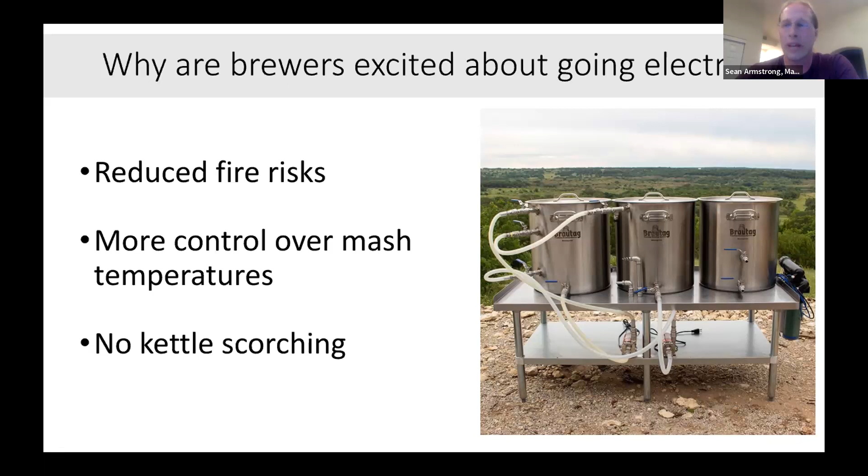So, beer brewing—why would you go electric if you're brewing beer? One reason is reduced fire risk, which I'll show on a slide in a second. Another is more control, leading to better brewing of beer. And there's no kettle scorching, which is good both for the materials and for the taste of the beer.

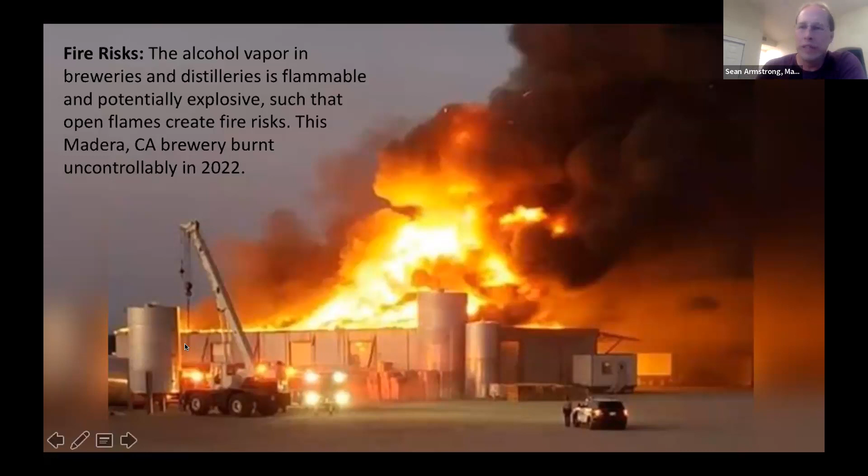Here's an example of what happens when you mix flames—like a methane fire, natural gas heating the tanks of beer, the mash and such—with the fact that alcohol, when brewing, gets into the air. You can have large buildups of flammable gas, since alcohol is flammable. Every year, at least a few breweries in the United States catch fire. I've been going through the news here stateside, and this is one example, near where I'm sitting in California. This fire burned for almost 5 days, because once the alcohol catches fire, there's almost nothing you can do to put it out. So one reason to stop putting flammable gas into buildings is that it causes fires.

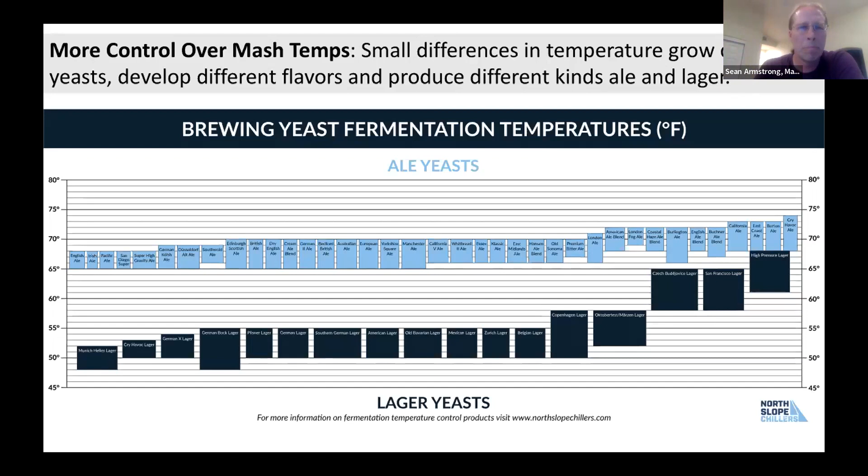As mentioned before, heat is added to foods at the industrial scale, but also at the smaller scale. However it's added, if it's added underneath, you can get, in the case of beer, you can burn the bottom of the pot. And if it's a very large kettle, you have to go in there and scrub it down. I have a friend who works in a brewery, and that's part of their job, is to scrub out these kettles.

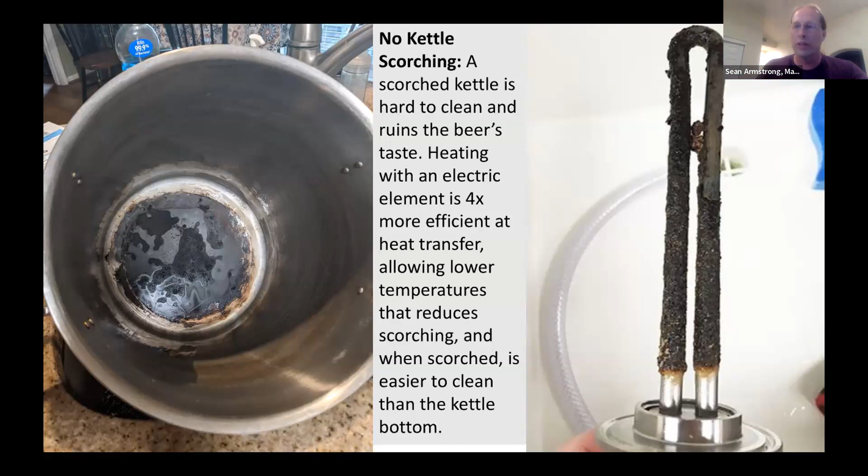When you're in northern Germany, they don't use solar collectors to make the heat. They use ground source heat pumps. They dig wells down in the ground, put pipes down there, and collect the heat from the ground. And I found that beer brewing changes the way that they add renewable energy, be it solar panels here or ground source heat pumps there. But it's consistent: they try to electrify the brewery and then add cheap electricity or cheap heat.

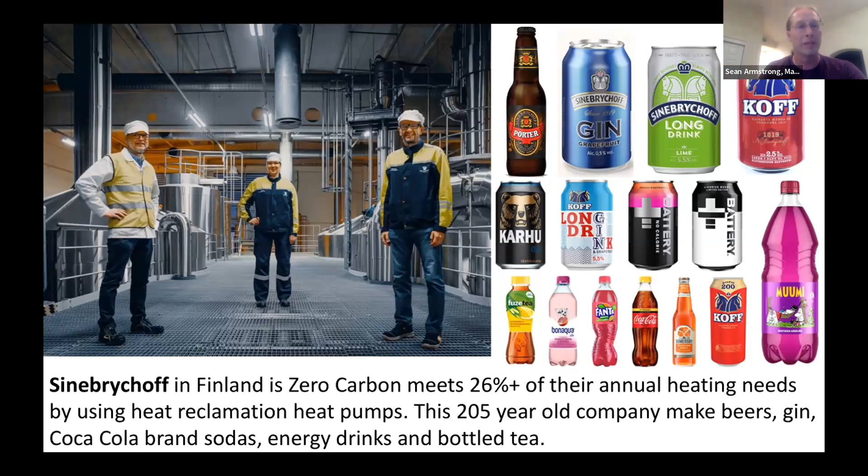They're taking the feces of the cattle and turning it into methane gas and then burning it. So they're doing biodigestion of all the poop that comes out of cows. When you bring cows into a dairy barn, they poop while they're getting milked, and then you have to scrape all of it out. What do you do with it? Do you just let it release all of the methane into the atmosphere, or do you capture it and burn it?

The latter answer is the best thing, because methane is a terrible climate change agent. So if you capture it and turn it into CO2 by burning it, you reduce the climate change pollution it causes by about 30-fold. It's like 1/30th as much pollution if you just burn the methane compared to letting it go into the air.

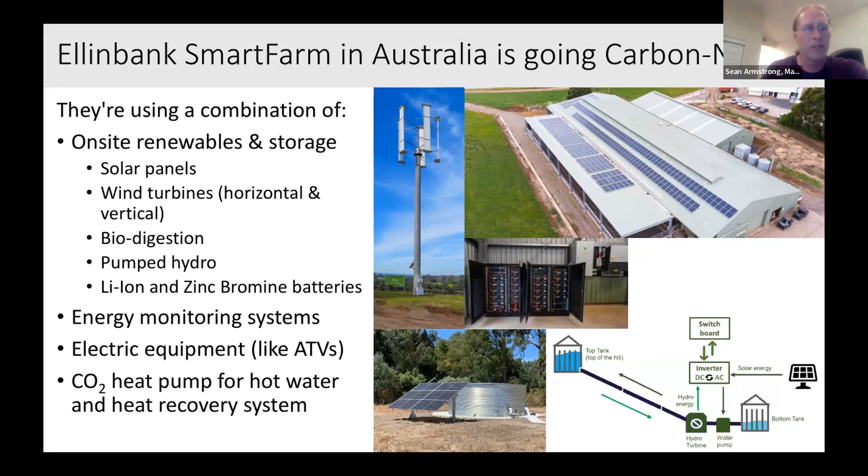Safer, more efficient, all electric, renewably powered.

Pasteurization can be done at lower temperatures, like 140 Fahrenheit, kind of slowly, or at a higher temperature quickly. But in either case, you add heat that is usually below boiling. You get the temperature up, but not to boiling temperatures.

Now you have this thing that's heated, milk, or it could be beer, or anything. You heat it up to kill everything in it, and then you need to take the heat away. That's an opportunity to recycle the heat. So instead of just sticking the beer into a refrigerator, you could stick it into the equivalent of a big building refrigerator, and as you pull the heat out, turn it back into source heat for the water that gets heated up again for pasteurization, and grab maybe, like you saw before, about 26%.

With this method of recycling heat, they only have to add heat at the beginning once a week. They start off getting a whole bunch of water really hot with their boilers, and then they're just recycling it for about a week before they have to start over again, adding heat.

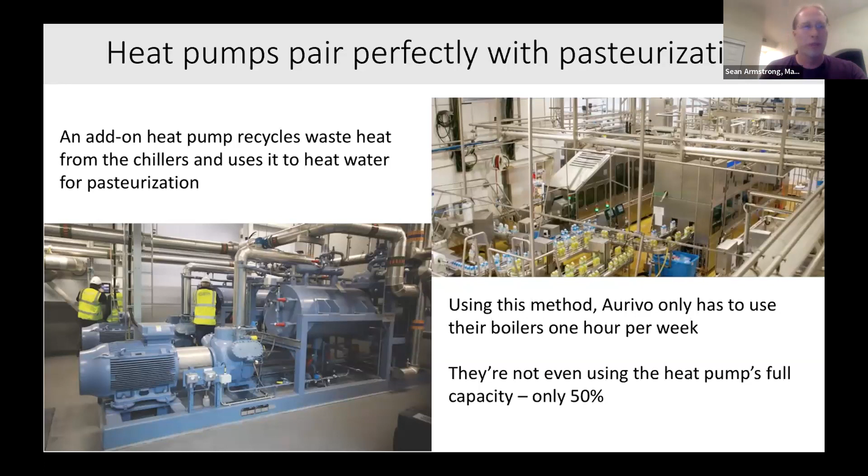Very impressive, very efficient, very good business move. The number one cost of this business after labor is energy. So first you make your facility efficient labor-wise, and then you make it efficient energy-wise, and that's good business.

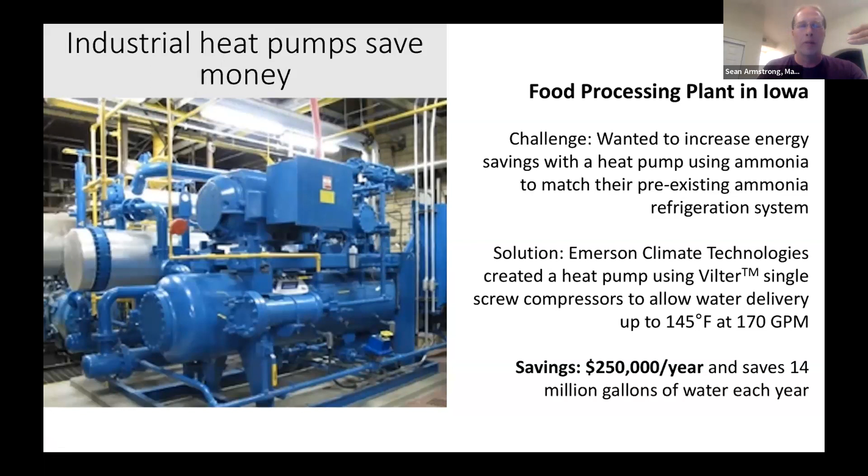On that topic of business, this is a good example of how this business is saving $250,000 US dollars a year by installing a heat pump. They did not have a heat pump before for capturing the waste heat, and now they're using a heat pump for chilling in this dairy facility here in Iowa. So yeah, a whole bunch of money just from recapturing the heat.

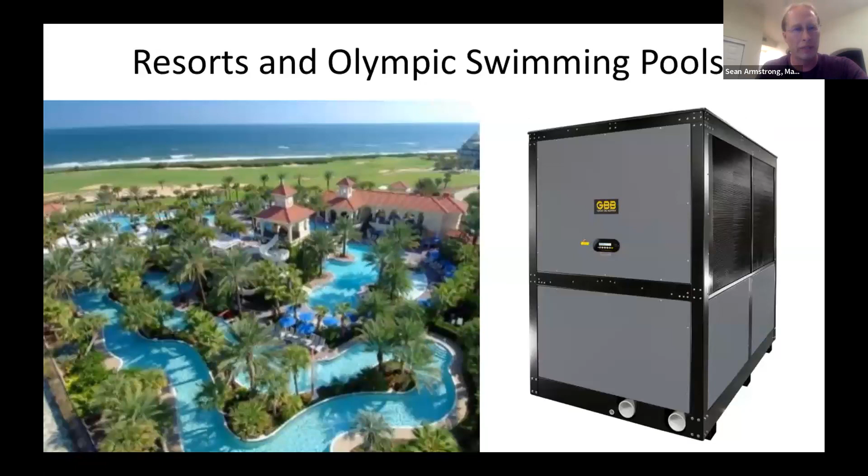I was going to go into restaurants next. Just pointing out, if you have a tourism facility, that commercial use, and you're burning gas in there, heat pumps dramatically lower the bills. And for that matter, if you're using electric resistance instead of gas to do any of the heating work, a heat pump will use 1/3 or 1/5 as much electricity as electric resistance. So big money savings, regardless if you're using fuel or electric resistance, by going to a heat pump.

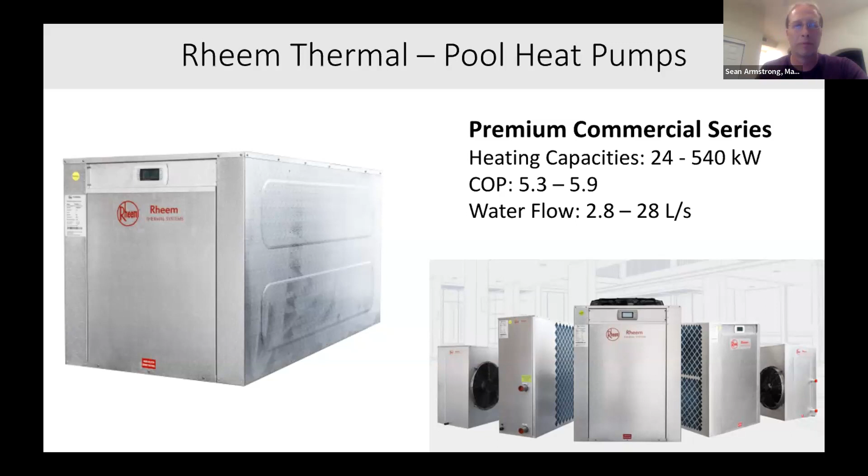And restaurants. So, reasons to go to this commercial facility and get rid of the gas. One is just burns and fires. Whenever you have open flames combined with gas, you have real danger.

I collect newspaper articles of restaurants that have blown up, and the question is always, did the person survive? Because usually what happens is they come in the morning, there's been a gas leak, and they're lighting one of the stoves, and the pool of gas around them blows up, and they're thrown against a wall, and they spend three weeks in the hospital in a coma, covered in burns.

So no burns, no explosion, no indoor air pollution. When you're burning gas, it's just as bad as smoking cigarettes. Gas from a stove has no filtration, no cleaning to it, it just burns. It's a very dirty burn.

In restaurants, they have big fans above the dirty burn in order to get rid of the air pollution. But if the fan isn't working well, or if someone puts their head over the stove, they're inhaling like putting their face into the exhaust of a car, only dirtier. The exhaust from a car goes through a catalytic converter, and there's no catalytic converter that takes out pollution from a gas stove. So if you get rid of gas stoves, you get rid of a lot of pollution. And it keeps the kitchen cooler.

Now let's move into construction, talking about how gas is being used primarily in industry. One of the biggest uses of gas is firing a cement kiln, a classic industrial use. They'll have essentially a gigantic blowtorch and torch limestone, and the process of heating it up super hot changes it and turns it into a dust that, when you dump water onto it, turns back into rock: cement.

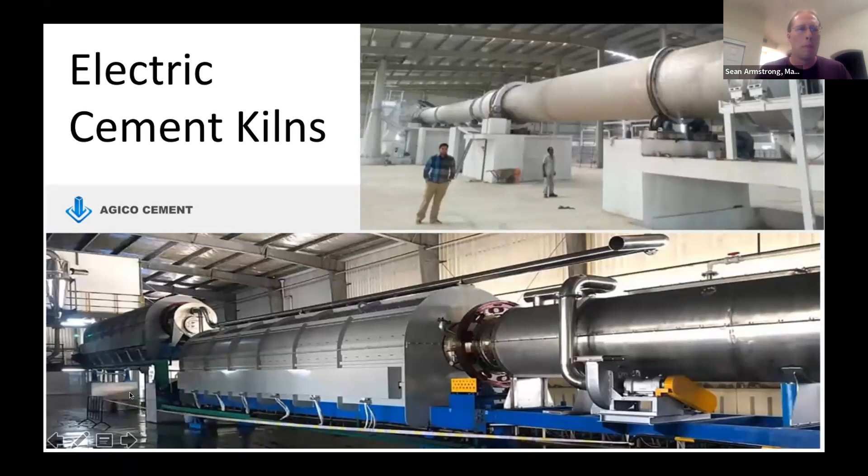This is kind of the future now. The semi-trucks just came out last year and this year, actually able to perform. We're seeing a whole bunch of them now on the market with really big batteries. I've seen them testing, taking them 1,400 kilometers on a charge - really amazing long distances. Big ones here in the United States, like the Tesla one that just came out.

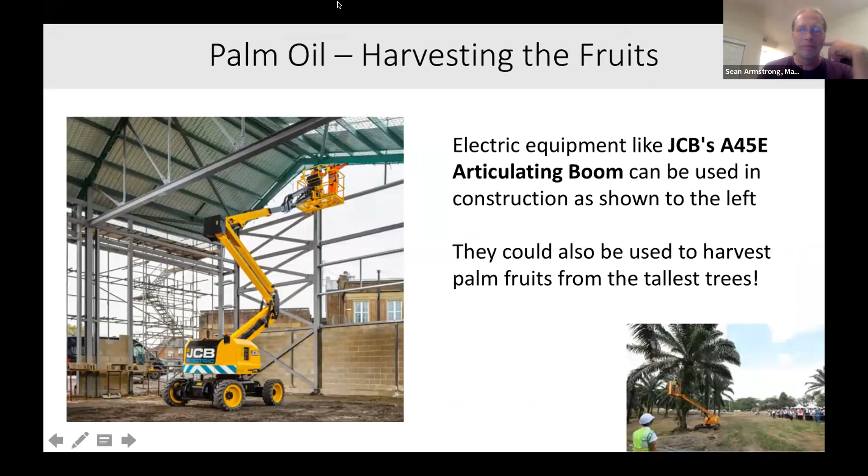You're hauling and pushing - farming often involves a lot of dirt work, so you make new spaces for things. These are just more examples of crossover: yes, this is construction equipment, but you might use it for farming.

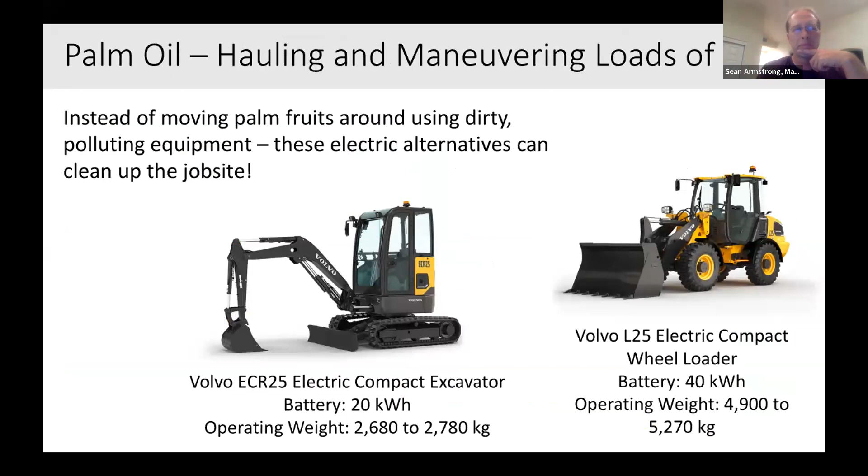Mining - Malaysia does a lot of mining, from my understanding. If you're trying to meet the needs of underground mining, underground is one of the most dangerous places to have an open flame because methane will build up and become explosive. That's often a cause of mine collapses and miners getting caught and dying - there was some reason for an open flame. As mining is electrifying, it's way safer without open flames. So Sandvik has announced plans to set up a new production plant in Malaysia for their electric mining equipment.

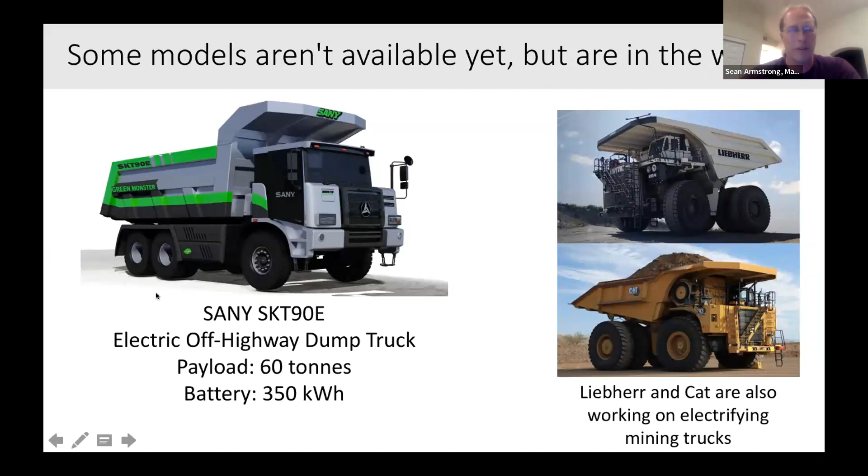Here we have an electric off-highway dump truck, and here's some more examples of mining trucks. They're not available today, but all of you are in this for the long haul, right? So if next year or the year following these trucks become available in Malaysia, if you prepare and get the community of business people ready for this, they'll be able to take advantage as they become available. Lots of these big vehicles are available now.

This is just a nice example of them trying to do it all at once. Norway is inarguably one of the leaders in the world in electrifying everything. Right now 80% of the vehicles being sold in Norway are electric, and they have electric construction sites at this point. In 2019, Oslo attempted for the first time to have a zero carbon, zero emission urban construction site, with buildings all around.

One of the nicest things about these vehicles is that they're quiet. Local businesses were able to keep their doors open during construction and didn't complain about the noise, because they're about 1/10 as loud. Your ears adjust for that, so it's experienced as only 1/4 as loud, but they are in fact about 1/10 as loud in terms of noise energy output. Still, 1/4 as loud is way quieter if you're near it. I'll note their grid is already 98% clean.

Malaysia right now, the grid is about 20% clean, 19% clean. But still, this is an opportunity to transition. Malaysia's grid is getting cleaner every year. The world's grids are getting cleaner every year because solar is being added hand over fist. Same with wind.

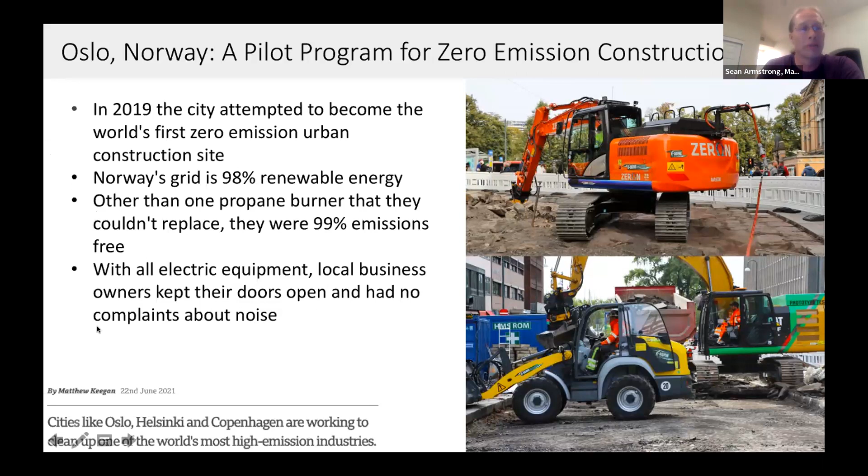Now, this is kind of fun. The Ford F-150, as well as many other vehicles, this is just one that's come out recently, and there's a fun picture of it. What they've done is, for construction sites, instead of having a generator, the truck itself is the generator, and it has 11 plugs on it that you can plug small equipment like saws into. You see all the things being run here, like chop saws and various Skil saws. All of them are being run off electricity from the truck.

This is one of the problems that we have in the United States, and I assume kind of anywhere: when you're starting to build, you'd like to have electricity, but usually you're building someplace that hasn't been built before, so it doesn't have electricity, or at least not to your site, maybe it's nearby. The process of getting electricity at your construction site is difficult and slows things down.

So what we're seeing is that cities in the United States are buying these trucks for landscaping crews, because landscaping crews can go out there and work all day quietly without disturbing anyone around them with their electric leaf blowers and electric lawnmowers. The city I'm presenting from right now has banned all gas outside landscaping equipment. You can't run a gas lawnmower in the city I'm in right now, Coronado, which is near San Diego.

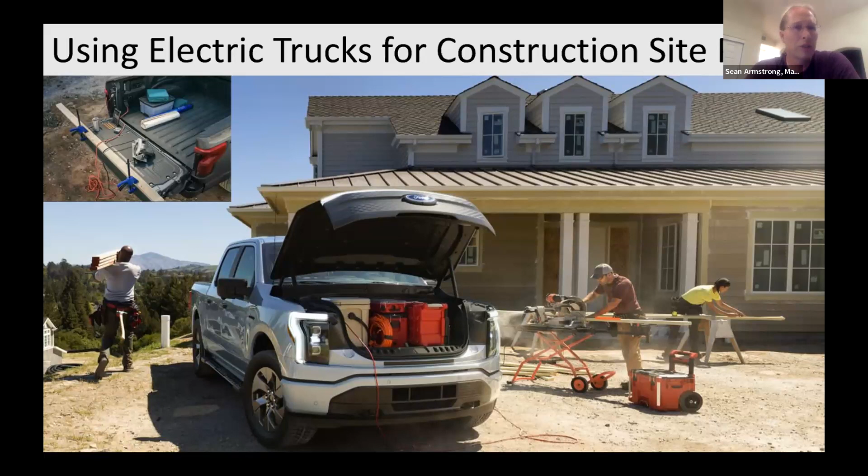So in that situation, you could have an expensive small battery, or you could plug it into this big truck. That's what we're seeing with cities around California where I am, the parks and recreation departments, which are kind of a construction department, they go out and do real work. They're buying these trucks.

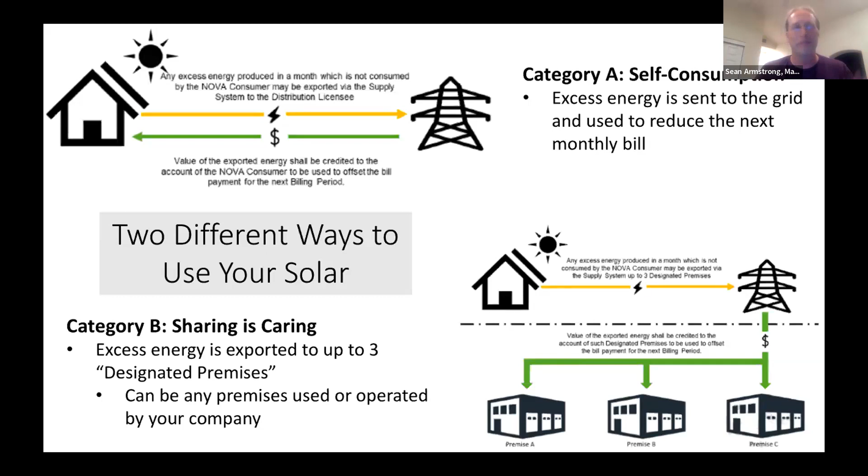Okay, so that is my presentation. I hope that it worked out for you. I realize I went over a couple minutes, but if you have any questions, I'm here in the chat, and I hope that made sense to you.